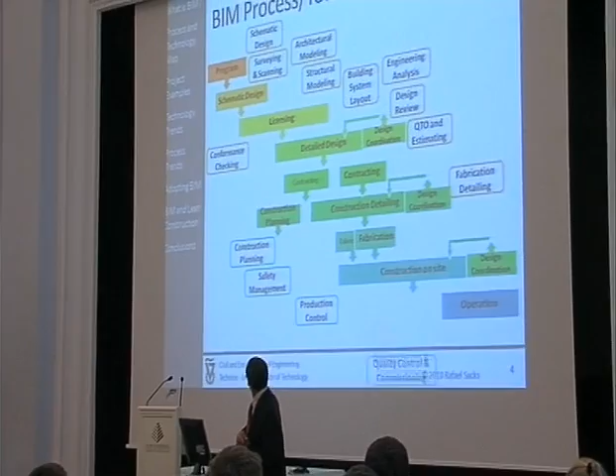But the theme that follows through from tool to tool through the process is that the information models can be handed from one to the other. At least that's what we would like to achieve. And so we go all the way through from schematic design right at the beginning, all the way down here to quality control and commissioning at the end.

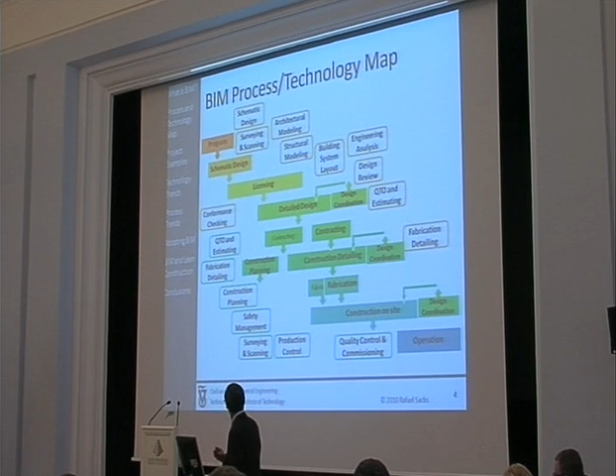And so using this as our map, let's perhaps go from one to the other and see examples, as many as we can manage in our time, of their use. So if I begin with the very early, very schematic design, there are tools like DProfiler, even Google SketchUp, Rhino, Revit Architecture, and the various tools that help us to analyze buildings at the very early stage of schematic design for energy.

In the area of surveying and scanning, we have software like Civil 3D and CloudWorx. And let's have a look at how that works. So here we go with our first example. I'm going to stand this side so that I can click and look.

What you're seeing here is a building from Portland, Oregon, in the northwest of the United States. And it's a unique building because it was an office building. It was built some 15 years ago. Over here you see it complete. But it was never occupied. It was built when the real estate market crashed. They couldn't rent out the space, and the building stood there for many, many years.

And along came the Marriott hotel chain; they bought the site and said, we'd like to build a hotel. And of course, the architects said, great, we have a site, let's design a big new hotel, which they did. And then the owner said, I'd like this to be a LEED platinum building. It must be very ecologically sound. And so the first thing they said was, how do you get points for LEED? The first way you get points for LEED is by recycling building materials. So then they said, well, can we use the structure and not demolish it, but use it as it is?

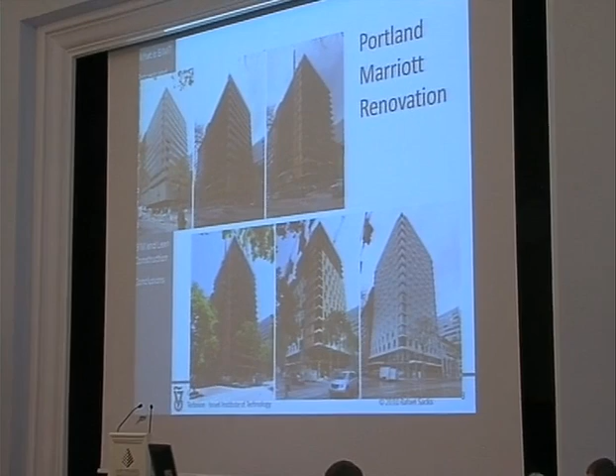And so what you're seeing here is the whole process. In the end, they dismantled all the facades, fixed the structure, redid all the interiors and all the facades, and built the new hotel over here. Now, how did they accomplish that? They took an office building and converted it entirely into a hotel in order to save the demolition. Well, they were only able to do this because they were able to use fairly sophisticated technology.

And what they did was they began by doing laser scanning. You can see over here this process. Laser scanning of the building, brought it into building modeling software, were able to redesign the new parts, move those new, especially the facade pieces, to fabrication using, again, different modeling software, bring the pieces and make them fit. And why was this important? Because try to imagine a 15-year-old structure that's been designed for different loads, and it stood there and it's sagged and it no longer has straight form.

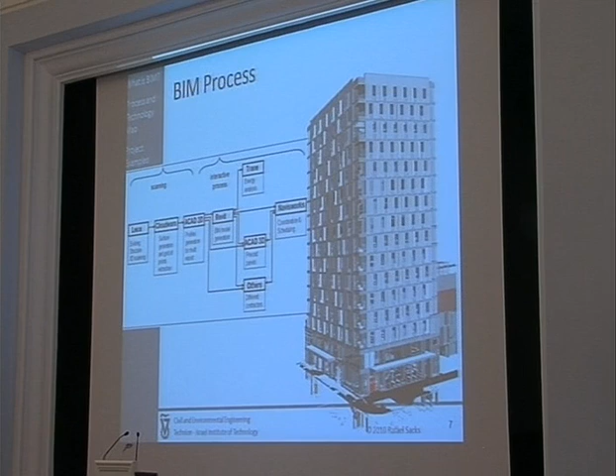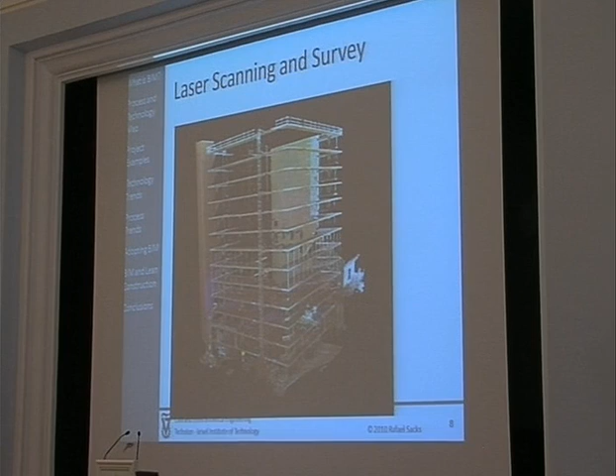Here, for example, is a laser scan of the building taken, and they took every floor from buildings across the road. And you can see that in the laser scan you can pick up all of the slabs. Now what they found was that the slabs had all settled, and so they all had different profiles. And so they used the laser scanning software to get the points, the point cloud, converted that into a survey, much as we might survey topography, and then were able in a surveying software to get the exact shapes of the slabs. And I will show you toward the end of the examples how they then used that information to fabricate very precisely the precast pieces to go on the front and make every piece different, but every piece fit perfectly in the building.

When we try to put all these various systems together, one of the advantages that building modeling brings us is the ability to find the clashes, the ability to coordinate properly. And I think perhaps it's these slides, although what you're seeing here are technical things. You're seeing systems, you're seeing building systems, mechanical systems, and so on, structural systems.

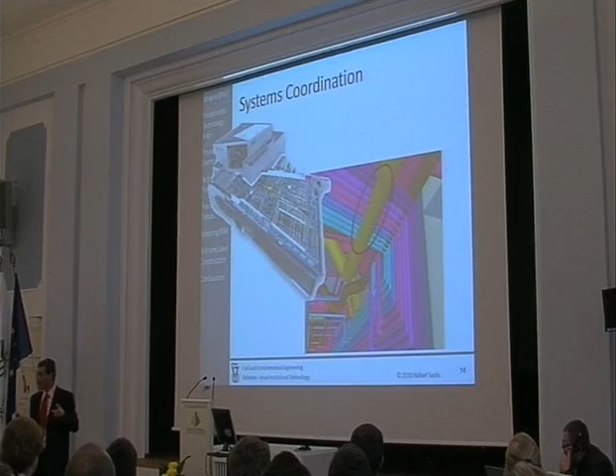But the message that I would like the slide to give you is this. There are different people responsible for each of those different systems. If the technology is able to create an image or a model where all those people can have a conversation and a discussion about it, and then they're able to resolve them and make them work together, then the technology is serving us. Otherwise, it's only nice pictures, of course.

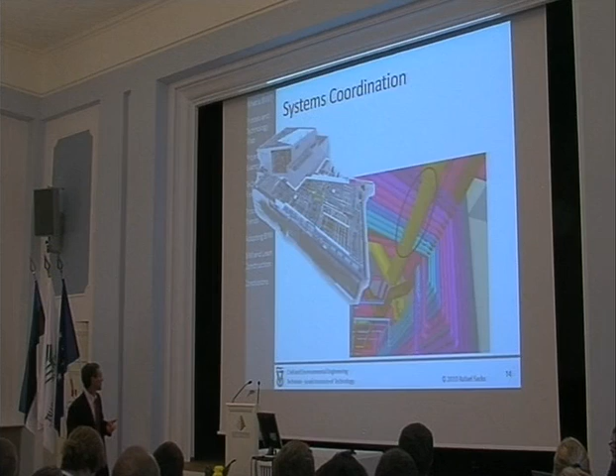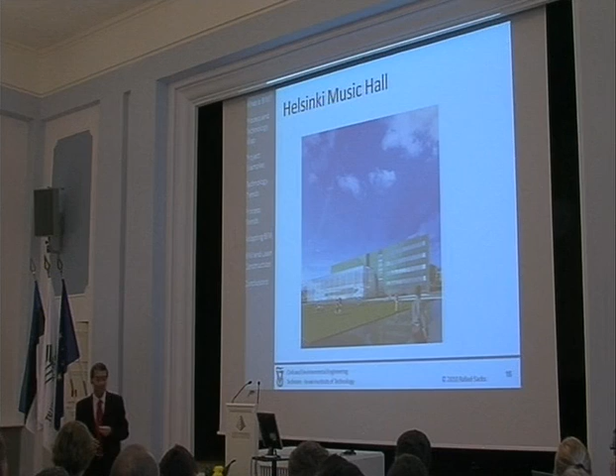And I want to show you this example from Helsinki here. We have many from Finland here with us, and it's not very far away, but it is really a remarkable building, the Helsinki Music Hall. And it's remarkable for a number of reasons, but perhaps the main reason is that they were able to bring together a wide variety of tools, but especially at the very early phases of design, to try to achieve the things that Rode was talking about, to try to make the building as comfortable and useful for its end users as it could be.

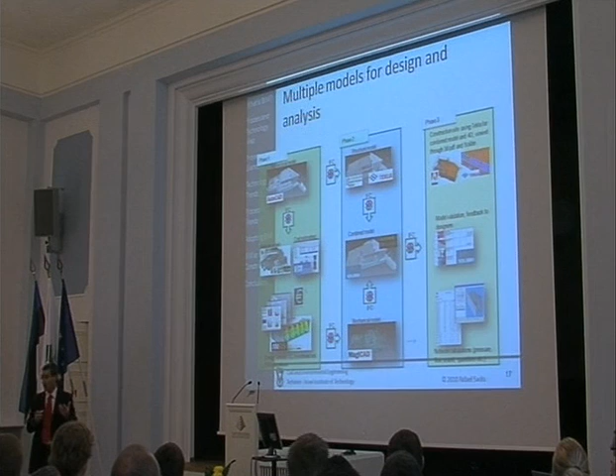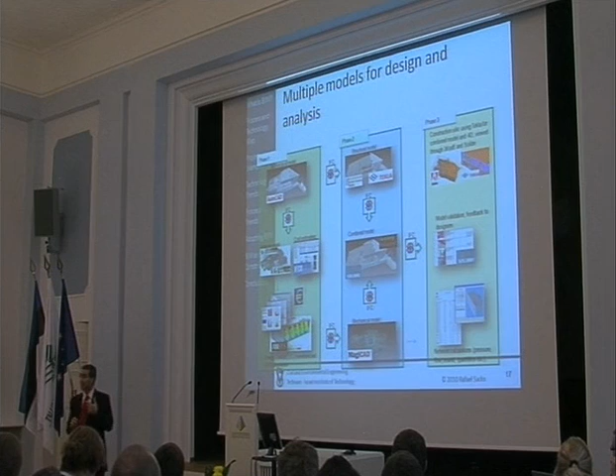We can see here in the process that they used that they began in phase one with a basic architectural model, an analysis model for life cycle costing and for energy, cost estimating, and energy and airflow ventilation calculations. So all of these were done at very early phases and were able to influence the basic shape and design and configuration of the building itself.

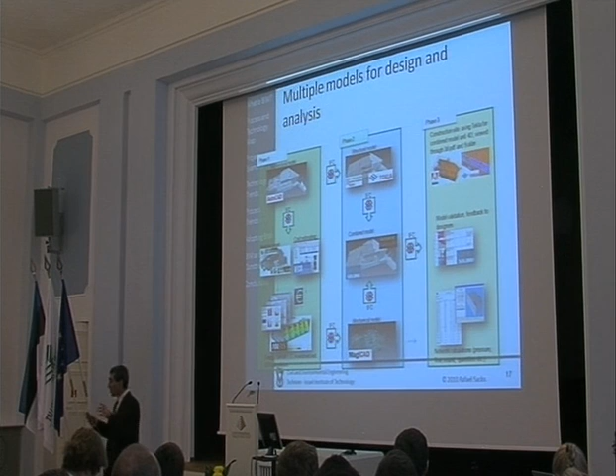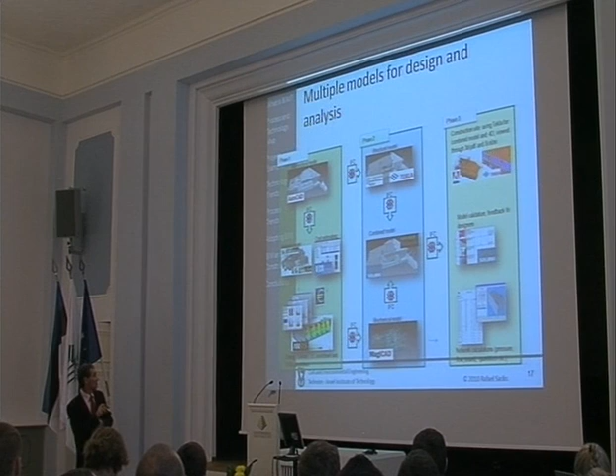Only once that had been settled were they willing to go ahead to the next phases and do the structural modeling, the mechanical modeling that you see down here, and then combine them in order to make sure that the whole building fitted together, was coordinated correctly, and then move ahead into the construction phase itself, where it's being used for 4D modeling, viewed through 3D PDFs and so on, and being used to give feedback to the designers on problems, but also to manage construction on site.

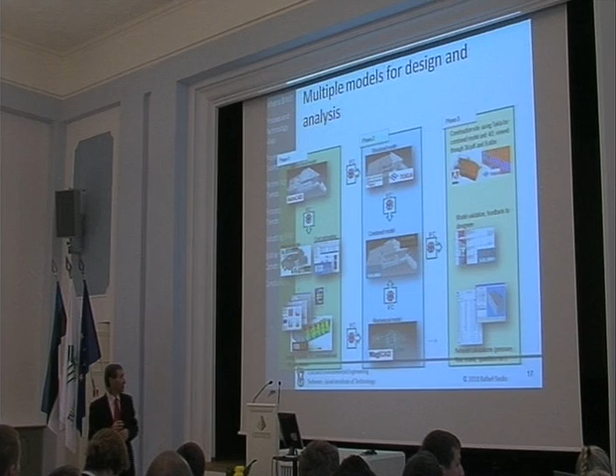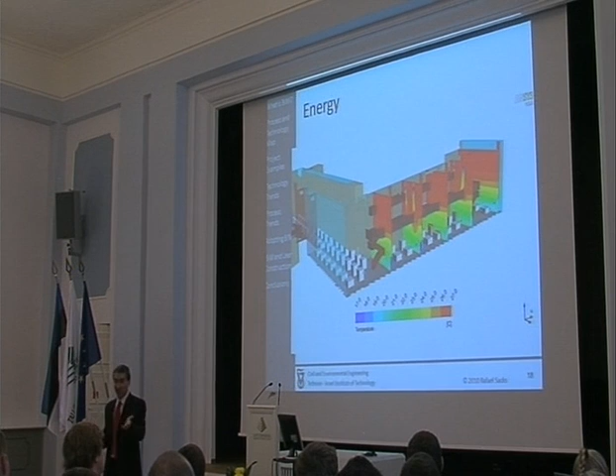These are the temperatures. And of course, in attempting to reach the right design and yet keep the cost as low as possible, both for installation and for maintenance, the idea was to try to reduce the size of systems or to compare different systems. So you can see that you can run an analysis and then you can rerun it and see the effect of the changed systems on the temperatures that would be common within the building.

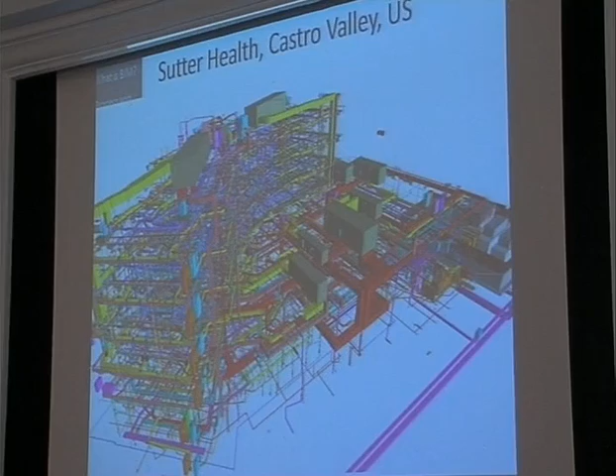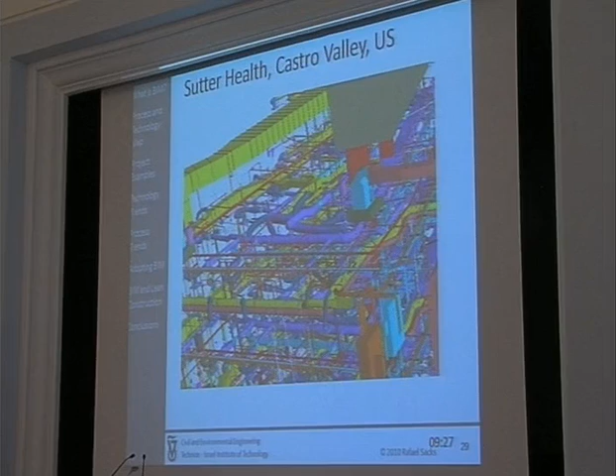And as I said before, the buildings are very, very complex. This again is a hospital. So if we even just narrow in on one area of this model, then you begin to see the multitude of systems that there are and that need to be coordinated properly.

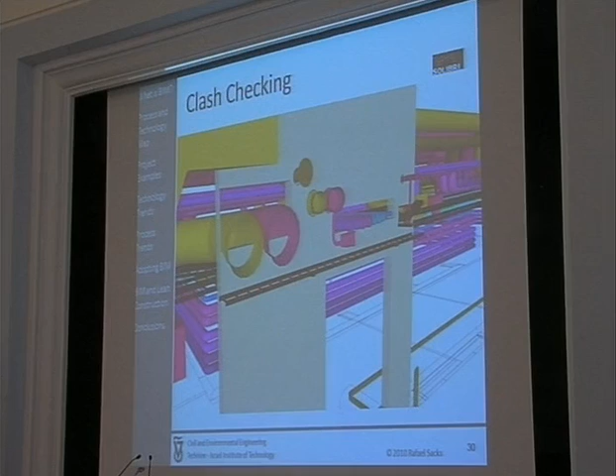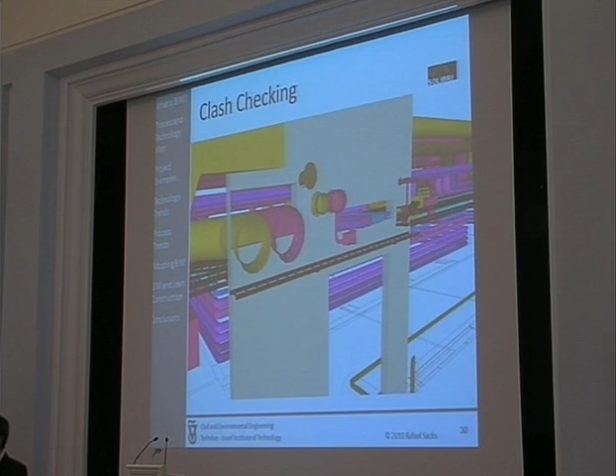Software that can identify those clashes at a very detailed level, this is now the fabrication level, is very common, and these are the things that, if used correctly, help us to catch those problems early and not wait until the construction itself for them to be caught. And because of them, there are fewer areas for contractors to make claims about changes during construction. And these are the things that, in a subtle way, are starting to change the way we relate to our

construction. And here again, I put this slide very specifically because I didn't want to dwell just on the models and on the software that can compare the clashes, but I wanted to put the emphasis here on the people. These were photographs that were taken during this project, and I think they emphasize a very important point. That is that on the construction site, or in the offices near the construction site, representatives of all the different subcontractors are meeting together. They're looking at the models. They're having these discussions around the models instead of, as in the past, having the discussions around the paper drawings.

And I think it's fairly obvious to us all that we have to be highly professional to read paper drawings well. Not only to read one set of drawings, but we have to read 6 or 7 sets of drawings simultaneously, compile all of that in our minds, and understand what's going on. Well, even most of our kids can read those models and understand what's going on. So the level of competence for people, the comfort of the discussion becomes quite different.

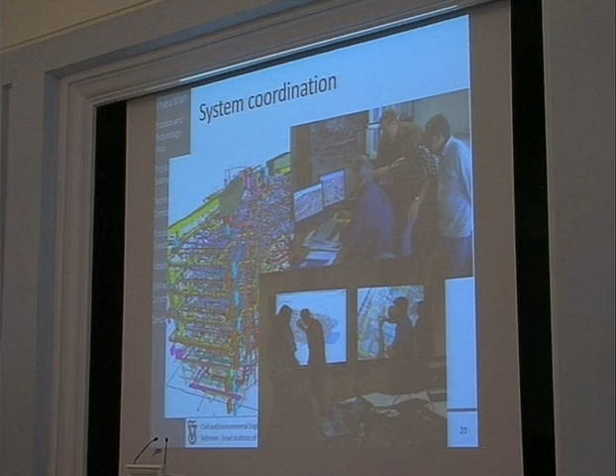And here too, you can see that in a very specific way, they're working not only on the design in 3D, but, well, it's a fixed picture, it's not moving, but they're working on it in 4D as well. So they're not just coordinating the product that will be built, they're talking about the process in which it will be built.

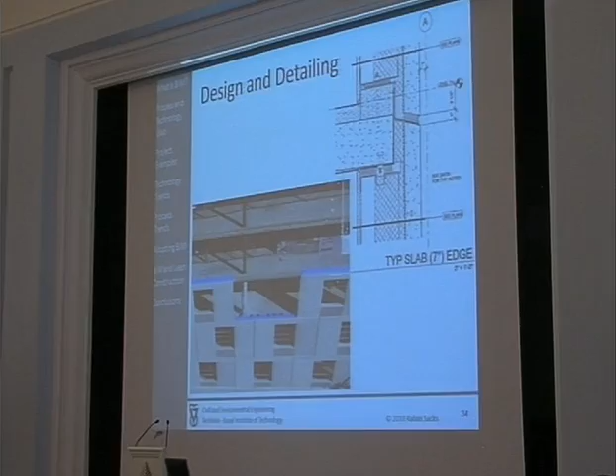But within the building modeling, they were able to put each of these pieces into the model very accurately, including the differences in height, fabricate them in a factory, bring them to the site, and attach them to the building, as you can see here. Every piece is different. Although they look the same, the bottoms were all adjusted, and they all fit. And you're able to do this, and do it in a reasonable time at a reasonable cost, only by virtue of the technology. It's a very simple building in the end, but it would not have been able to be done in this way without that variety of tools: the scanning, the surveying, the modeling, and the control of the fabrication.

When we think about this automated process, another feature of it is that in the past, we had a number of sets of drawings. We had schematic drawings in 1 to 100. We had design drawings in 1 to 50. We had perhaps detailed drawings in 1 to 20. And as the life cycle of the project went on, the information changed. Nowadays, we still have different models, but we don't start from scratch each time. We take the model we had before, we bring it into some new software, and we continue from where we left off.

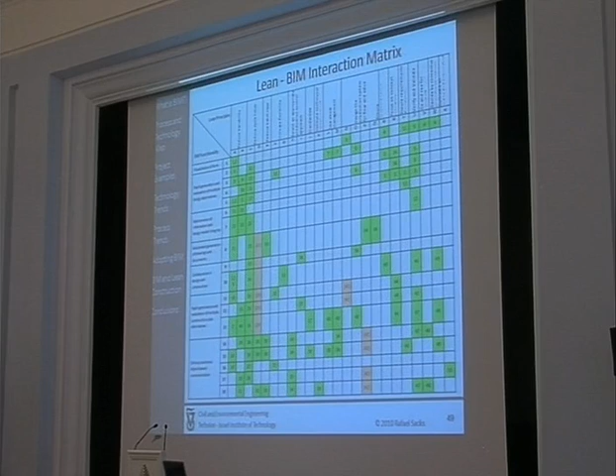And so in the table, here at the top, we have all of these lean principles. And down here on the side, we have the BIM functionality. And you can take off your glasses and just see a blurred version of this. The important message is the green bits, because the green bits are all taken from case studies and instances where we can identify behavior where, by using the modeling, we're becoming leaner. There are some instances, here the red ones, where by using modeling, we actually create waste and do things that are not so productive. So by understanding this a little, we can get a better idea.

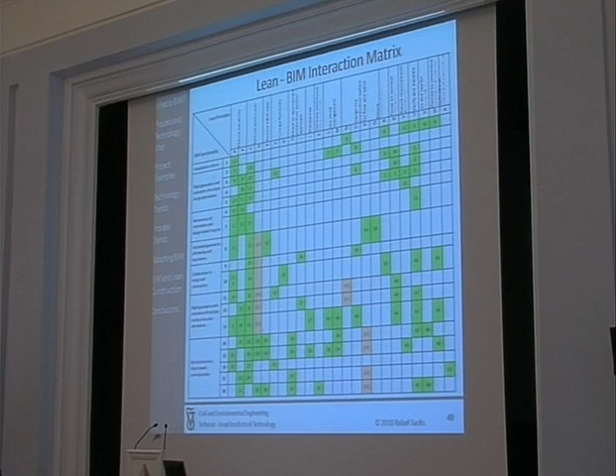But for us in the research community, I think that the important thing is that we use that as a guide to understand how we can begin to use the modeling better and to design new software, new tools that can help us to make projects lean. And that's what this project that I will show you is all about. Well, you heard last year, I'm sure Lauri used the word flow many, many times in his presentation. So you heard all about pull flow control in lean production management, and I'm talking with you about building modeling. And when we bring these together, we have this idea of KanBIM. And here's what it's about.

It's all about enabling, on the construction site, in the final analysis, work teams, team leaders, and the work crews themselves in very complex buildings, shopping centers, very high-rise apartment buildings, very big office buildings, transport buildings, and so on, that are not just more of one of a kind, but very difficult and complex projects. What we want to do is enable them to get all the information they need about the building, about their work, and about the work that other people are doing around them on the back of a model. So you see the model and the use of a very big touch screen on a support that can be brought to the construction site.

Yeah, can you run that video?

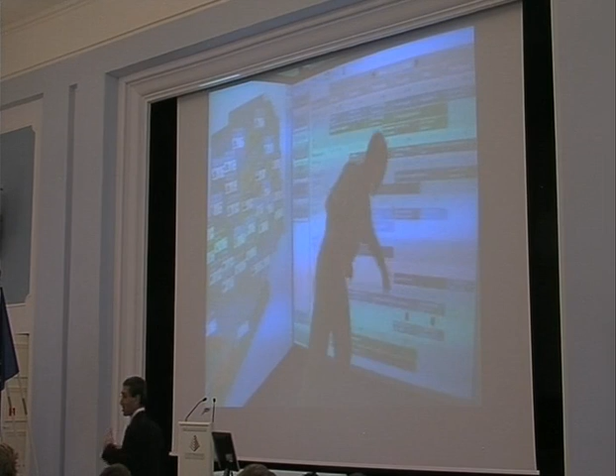And when they do that, they have one screen here on the side where you see a building model with all these icons of the activities, the tasks of different teams. And you also see here on the other screen, this would be all the trade managers sitting together in a meeting, looking at these 2 screens. And here, you can't see it in very high quality, but it shows you for each space in the building and for each contractor through the week what the different tasks are.

And what they're trying to do is to say, well, what happens if 2 teams want to work in the same space? And then we could look at the model, and the model will show us the state of the building and the temporary equipment, like the scaffolding. And we would say, well, can these teams work together there, yes or no? And we have a discussion between all the managers of what the weekly work plan should be.

And then we come to this touch screen like you saw in the photograph before, and in a moment it will show you the screen itself in a live way. So you see on the screen the building, and you see all these different symbols, which are the tasks that each trade is meant to do during the current week.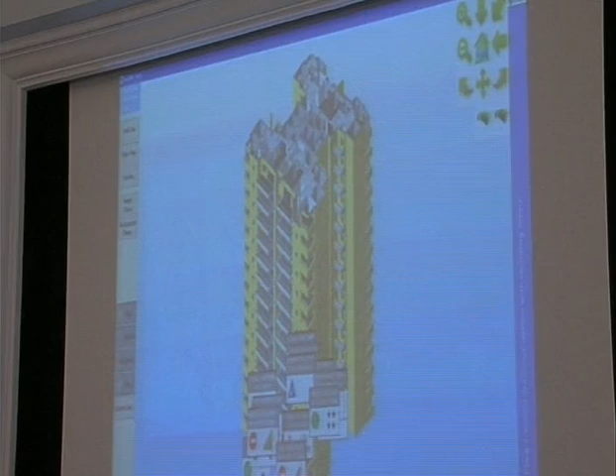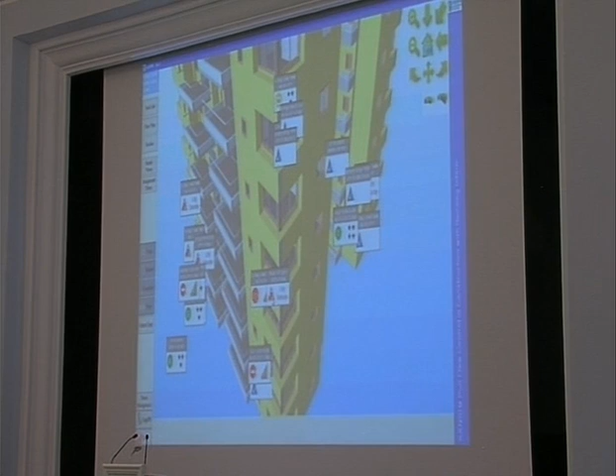So you can see here, for example, that if I were doing drywall or some other trade, I could come along, I could have a look and see where I'm working right now. These different symbols like go or stop or complete or no entry, they're telling me what's the status of that piece of work. So if I was doing walls in apartment number 25 and the architect changed the design, I will have now a no entry sign because the work's not ready. There's some change going on. If I begin work there, it would have to be changed or demolished.

There might be symbols like in progress, so I know there's a team working there, maybe one of my teams. And I know, for example, how long it's meant to take. I look and I see where the other teams are working around me. I can click on any of these icons and it will open up and give me all the information about that task. It will highlight for me, you see here, that I'm clicked now on one task. It will show me exactly the objects where I need to do this work.

And of course, this is a research prototype where we're not software developers, but eventual software would have a very detailed display of what the work is that I need to do there. And again, if I open it up, it's telling me, are the materials there? Is the equipment ready? Is the information complete? And is everything ready? So I could see a range of different information about this work that I'm about to begin doing now. It could, for example, give me the safety information. How should I be doing this particular kind of work? It could bring me the drawings. It could tell me where the material is and whether it's on site.

And what you're seeing now is exactly how a foreman would come along, would log in to the system and report what they're doing. So they would say, show me what's on the third floor of the building, what work I'm doing now. Just show me the third floor. And here's a work that I'm doing now. I've completed that piece of work. So I want to tell the system that I'm finished. So I tell it that I'm complete. I had a problem with something, and I'm finished that piece of work. And the symbol now changes to the work's complete, and the system sends a message to the engineers to say, come and check.

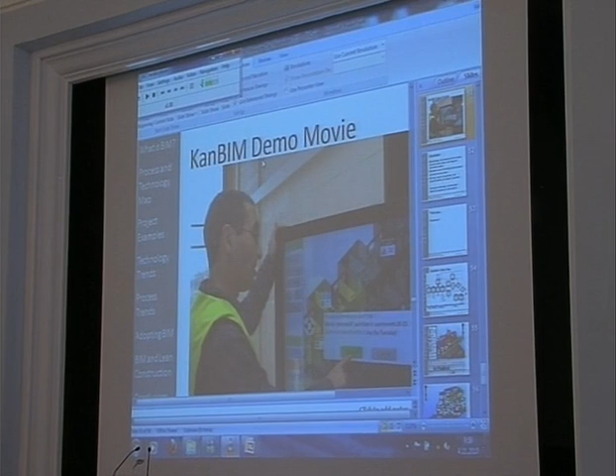And now I say, now I'm going to go and do this piece of work with my crew. So I click there on the go. I ask it to show me what the work is, so I have a good understanding of what I'm about to do. And then I would say, go. And it would ask me, okay, are you willing to commit to do this piece of work and finish it within 2 days? And I would say, yes, thank you, and walk away. And so it's not only that we're delivering information to the workers on the site about the process, but that we're also collecting information about what's happening so that we can inform everyone else.

And before I thank you and ask for questions, I would like to just add that perhaps the main area of research and development nowadays is how do we now bring all this information really to bear on construction sites, even more than just the clash detection, but in order to help us control work and coordinate work better. We're seeing already right around the world that building modeling helps us to coordinate design very well. Now it's going to begin helping us, we hope, coordinate construction much, much better than we have been.